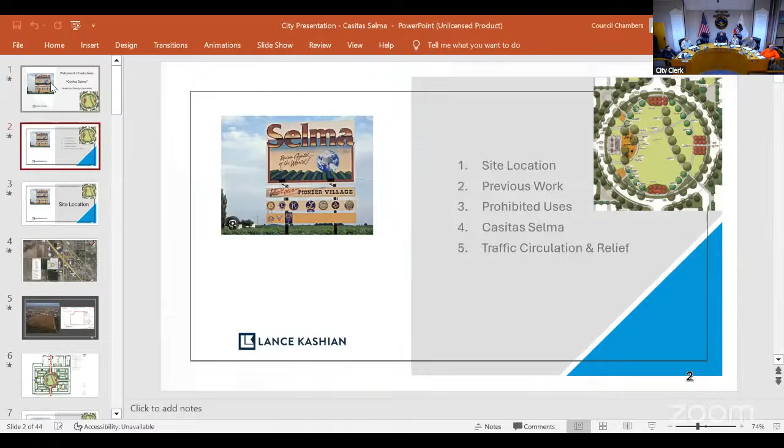That's... the other one. Get the slideshow ready. Can you guys hear? It's quiet. Test 1, 2. Test 1, 2. Okay, sorry about that. You can just make it bigger.

That one, okay. Before you, we have the Selma Casitas project, project 2022-0030. This is again for a general plan amendment, annexation, pre-zone, tentative subdivision map, and site plan review. Click on the screen somewhere, please. There you go. The applicant for this project is River Park Properties 2, owner Edward M. Kashian. The location of the property is west of Highland Avenue, north of Rose Avenue, south of East Floral.

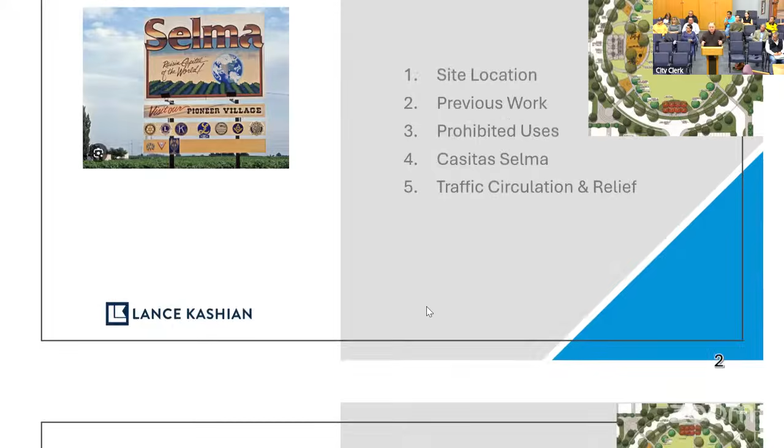We clearly know that there were several questions. We were fortunate enough to be able to meet in this room a few weeks ago and have a community workshop, have certain questions raised and respond, so to inform the community.

Site location - as Lupe had indicated, it's on the west side of 99, south side of Floral. So this is where it looks like juxtaposed up against the balance of the city.

And there's an aerial view of the real estate, the subject real estate for the site plan portion that you can see is obviously just adjacent to the Food 4 Less.

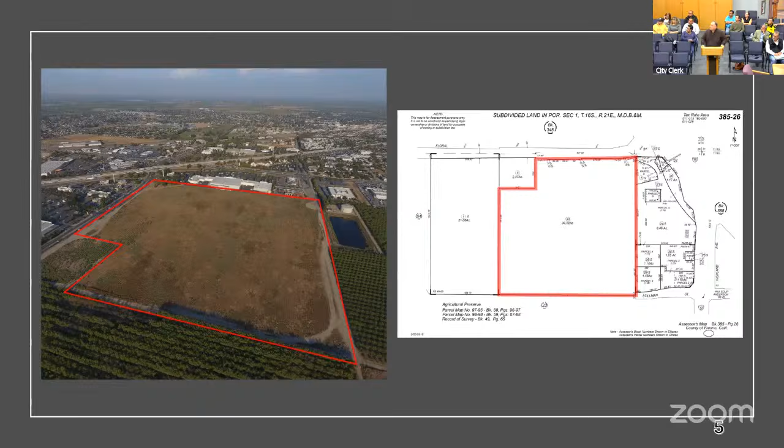This is a rendering of what the site would look like with the landscaping applied. Sometimes just seeing a plan view is when you're looking from top to bottom of what this would look like, and we thought this would help you understand the amenities of the project and how the park is juxtaposed amongst the community.

We strongly emphasize a pedestrian-friendly mixed-use project. It's something that we're fairly used to developing in the master plans.

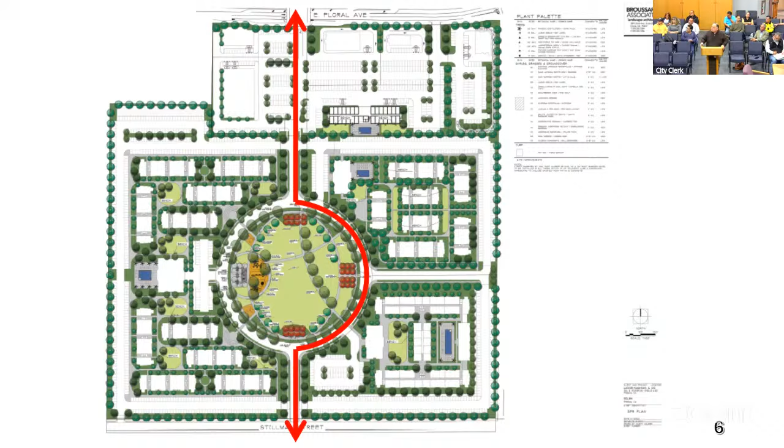We're entering into the city of Selma, and we take that very seriously. We think it's important, having grown up in Easton and the metropolis of Del Rey, we like to know who we're doing business with, that we're not going to be coming in from out of town and building something and leaving. We've kind of all grown up along here. In fact, I think I've lost too many games to Selma High football when I was at Washington, but we'll set that aside for a minute.

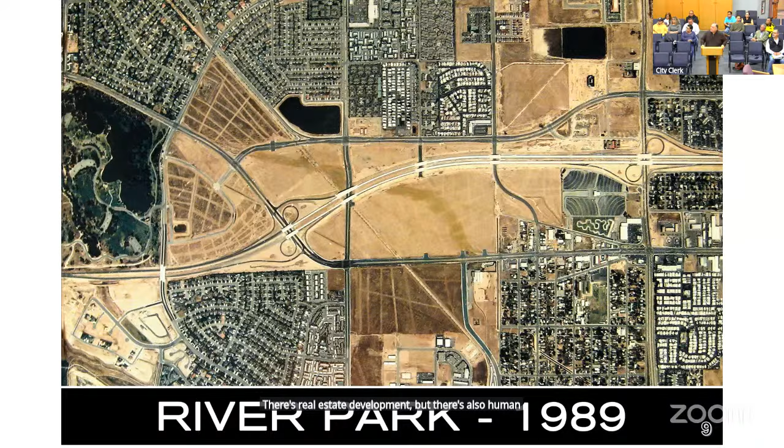This is the Village at River Park - this is the office side of this mixed-use master plan. We have about 500,000 square feet in multiple office buildings.

Then years later, there's about a 42-acre master plan on the campus of Fresno State. We felt like this would be an incredible amenity. Although I didn't graduate from Fresno State, I certainly attended, and Campus Point has done well - it's one of the highest densified areas, I think, in the valley, call it between Bakersfield and Stockton.

We have about 1,000 units of student housing that's really performing well. We have 141 units of workforce housing, an 80-20 mix with 20% affordable. We have 142 units we opened a couple of years ago - some of you may have been to Matavillosa, we're very proud of that, market rate senior housing, beautiful and performing well. We'll also open a 138-key Hyatt House Hotel, looking like December 10th. This is fairly dense, certainly much more dense than what we're looking at in Selma.

This is what Campus Point looked like in 2011, and you can see that in the master plan we laid down the infrastructure first, and you can see the beginnings of what we call Palazzo. That's the 1,000 beds of student housing.

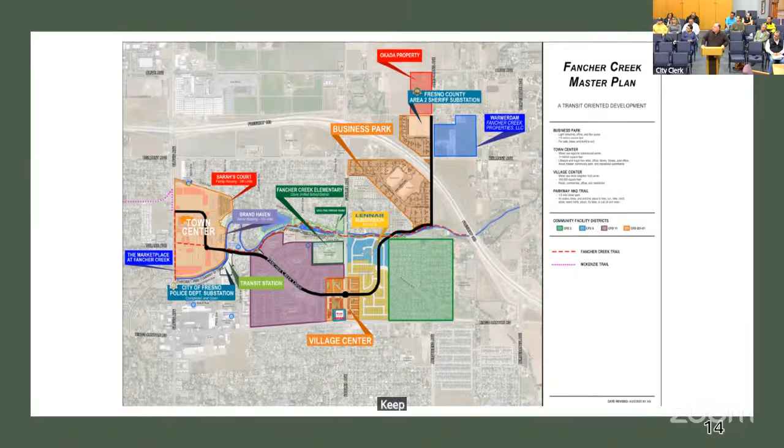We'll get there. This is a couple images of Matavillosa. We wanted you to see specifically some of the housing that we have developed.

This is Palmilla, the workforce housing on the campus of Fresno State that I mentioned earlier. And this is the Palazzo. This has afforded a lot of good experiences for students. They have a great time at this facility, and we have multiple property management teams that help us manage it.

So enough of that work. Let's begin to turn our eyes toward this great city, and discuss prohibited uses.

There's been a number of questions posed to our team asking why we don't design a Costco or a Target. We're fairly used to it. Ed Kashian's built, I think, 52 Costcos in California. We're a little bit used to it, but we're simply prohibited. We cannot. It's part of when we acquired the property, it's not something that we designed in.

This was formerly held by Walmart, and so it's restricted. We can't put a discount store, a wholesale membership warehouse club, a grocery store, a supermarket, a pharmacy or drugstore, a dollar store. You can see the list, and we're not going to do adult bookstores - that's not what we do for a living. But these are just simply prohibited. We can't. We're restricted.

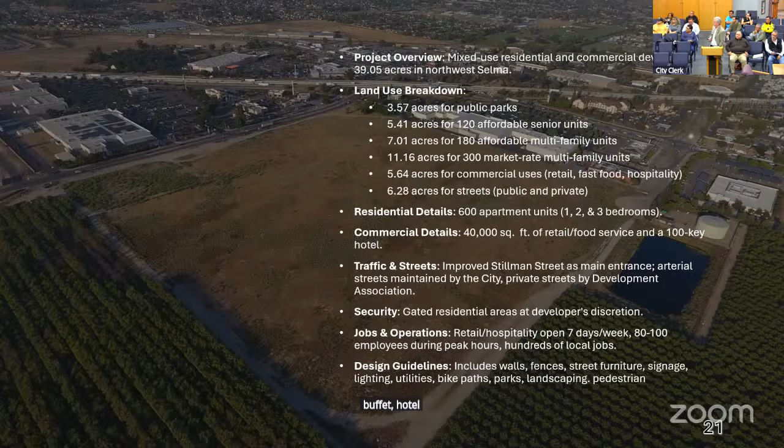We could go to the next slide. So the project is laid out in about 5 major areas. Along Floral Avenue we've got our retail portion. There's 2 pads laid out for drive-through restaurants, some linear retail, a large or mid-sized box planned on the west end here, and this would be the hotel here. That's kind of our front door off of Floral.

Once you get introduced to the site, you get into the housing area, and we've got 4 distinct areas of housing, all with equal frontage looking out on our central park. Affordable housing: 7 acres, 180 units, 3-story garden walk-up units with plenty of land for gardens, walkways, parks inside, and a 6,000 square foot clubhouse for the pool area and main front door of that unit.

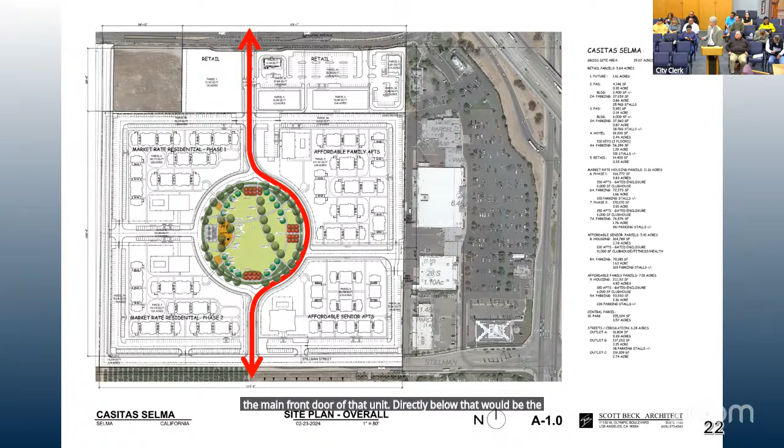Directly below that would be the affordable senior housing—similar layout, 120 units, 3-story walk-ups, about a 10,000 square foot amenities clubhouse. The west part of the site is divided into 2 equal areas for market rate housing, each with 150 units. They're all meant to be about equal scale, and they all surround what we call our central park area, about 3.5 acres, about a quarter mile in circumference. I'm going to have Dusty explain a little about what's going on there.

Dusty Valero, Broussard Associates. I think next slide, right? So we have the Central Park.

A lot of amenities here. You'll notice connectivity to the north, to the business center, connectivity to various areas throughout the site, up into each quadrant of the housing development, and to the retail center up north. We've got a robust park program here.

So in the center, in that kind of yellow area we show, we've got play equipment for ages 5 to 12 and 2 to 5, as well as a swing set. Those are popular, and a standalone spinner where kids spin around—really fun. So we've got a playground there for a lot of ages.

Below that, to the west, we've got a seating area with a covered shade structure. So this park is going to have plenty of green, plenty of shade, plenty of circulation for adults. There's park workout equipment at 2 nodes on the site, in the lower yellow portion. So you can take a stroll through the park, jog through it, stop at these little stations, get a workout in with your community group, and keep moving through the park, maybe while your kids are playing.

Up at the top we've got accent trees—the red shows beautiful accent trees with seating areas beneath, so you could sit, look at the park, take it in, just be in nature in this development. We anticipate barbecues, seating, trash and dog waste stations to keep it clean and organized. We think it's a pretty good program for the people who live here and for the larger community of Selma.

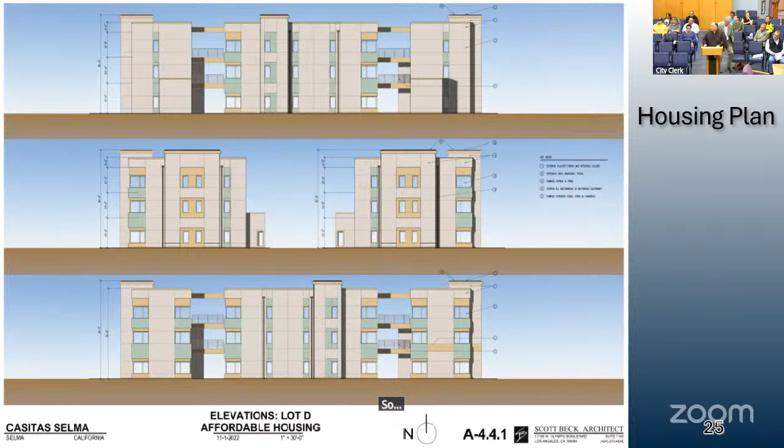We want to touch base because sometimes we get questions—that it's affordable housing, it's poor folks' housing, it's going to be rife with crime. So we just wanted to hit it head on. What is affordable housing? We really consider it workforce housing. Let's take a look at some of the work that we've done. Next slide.

In Selma, the average area median income is $55,000. Generally, what the tax credit committee calls affordable is units restricted to those making 30% to roughly 70% of area median income. So what does that mean in dollars? If your median income is $55,000, you're looking at somewhere between $16,000 at the 30% area median income level, up to $39,000.

What does that really mean? Who are these folks? It's us. It's many of us who are just hardworking families that happen to have incomes that qualify. These are often your neighbors, our uncles, our aunts, many of my family members. They're just at a certain point in their income qualification, working a job at Walmart, fast food, or a cannery. The rents need to be affordable, so really this is workforce housing.

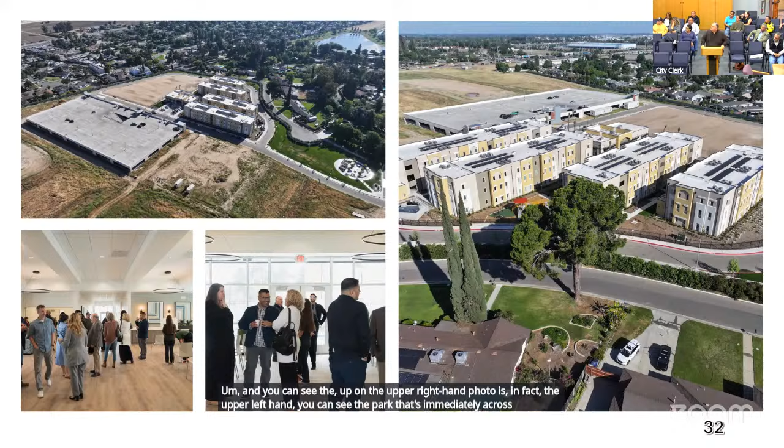This is the project. That's the interior on the bottom left, the community room with meeting space and workout rooms. In the upper left photo you can see the park immediately across the street. This area is not totally developed out yet.

This is the senior project — 180 units. Both this and Sarah's Court are 100% occupied, or stabilized around 98 or 99%, just due to some turnover. It's beautiful and affordable, with tutorial and social services coming in and out. It's very popular, and I think the residents there are very happy, very different from the housing project I used to live in in Delray.

This is very different than the housing project that I used to live in in Delray.

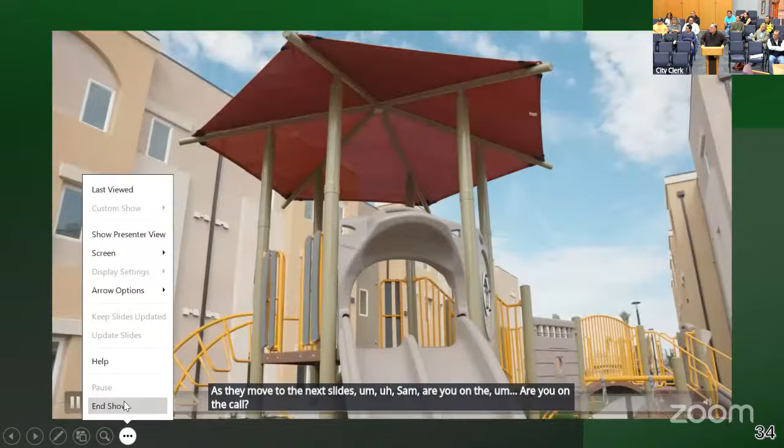We'll talk about security here in just a moment. Sam, you want to give us just a couple of bullets? Sam Bogdanovich — I didn't introduce him earlier, but he's our real estate broker consultant. For the 5 acres we have in terms of commercial, I thought this would be helpful so you truly understand what we're looking to accomplish. Sam, why don't you give us a couple of bullets on the status of retail?

Sure, you bet. My name's Sam Bogdanovich, I'm with Commercial Retail Associates. As Sal mentioned, we've worked together on all the projects you guys have seen tonight. Like I said at the community workshop, I probably have the easiest job here, and I probably don't need to tell the Planning Commission what a vibrant retail environment Selma is. It's really gotten to the population stage where a lot of national retailers are looking around town — pad users, fast food, chicken, tractor, a whole bunch of different retailers looking in town. Our project is going to include probably a couple national retailers, also geared towards neighborhood retailers to service the households that are part of this project and the surrounding areas. So my job's probably the easiest on the whole development because we don't have a lot of retail, relatively speaking. But as far as Selma goes, it's a really vibrant retail market right now, busy with a lot of people still looking to enter the market. Thank you, Sam, much appreciated.

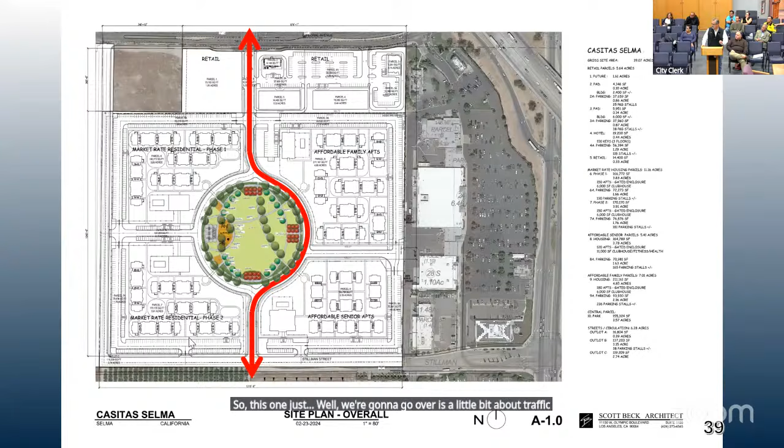So one of the things we have today is that the entirety of the traffic going to the Walmart shopping center, whether it be the auto dealership, the Toyota, the hotel, and the new businesses opened up by Neil Angelillo, which was the Starbucks, the Chipotle, the Habit, they can only get in and out from the eastern, southern, or northern part of the city through Floral Avenue. That's really their only choice without going a few miles out of their way. So that's what you're seeing in the arrows here.

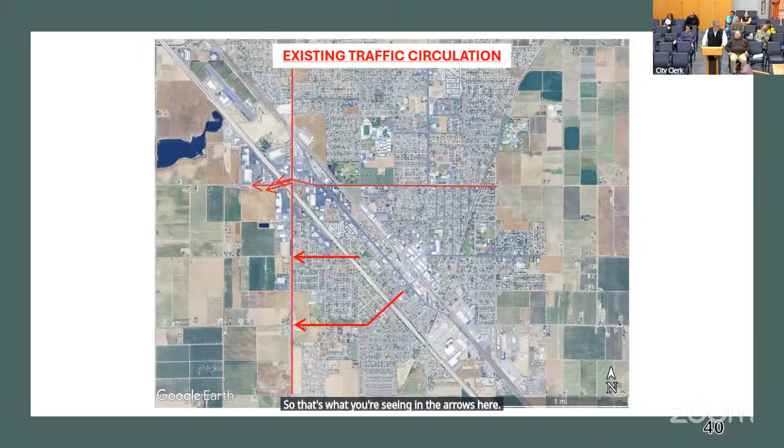Let's go to the next slide. So once the project's set up, it still has that, but this project will be building Stillman west to the western boundary and also a north-south street on the west side of the property. That acts a little bit of a relief valve. It's not going to solve all your traffic problems, we're not here to say that, but it will give us other ways to get to the project, and it will give the community other ways to get to the Walmart shopping center or to the western portion of the unincorporated area.

Another thing I'd like to point out is today, absent connection through Stillman and north-south between Stillman and Floral, we have no choice but to go through 5 traffic signals. Once this is built to get to this shopping center, the only signal that if you live on the southwest portion and possibly even some of the southern portions of the city, you could use Stillman and get to this center, and that would be one signal.

Hypothetically speaking, if you go through one signal on, say, a 90-second cycle length, and you catch it at the end, you wait the whole cycle, 90 seconds, through one signal to make that turn potentially. If you had to go through 5, you multiply that by that same amount of time, but a little more, because Highland at Floral is the busiest intersection, in addition to the southbound and northbound off-ramps from the 99.

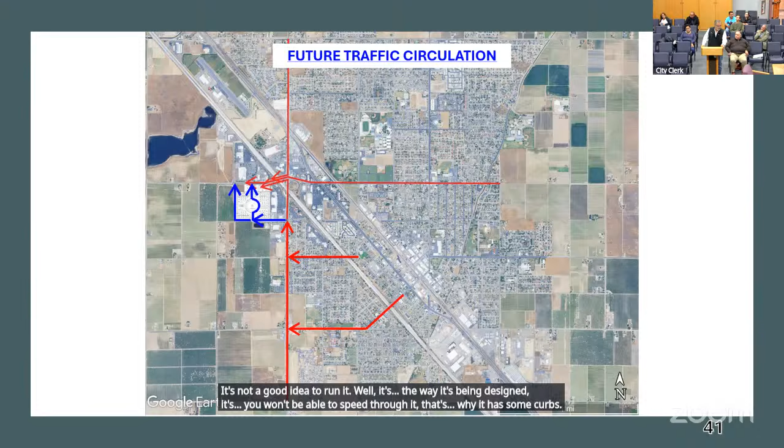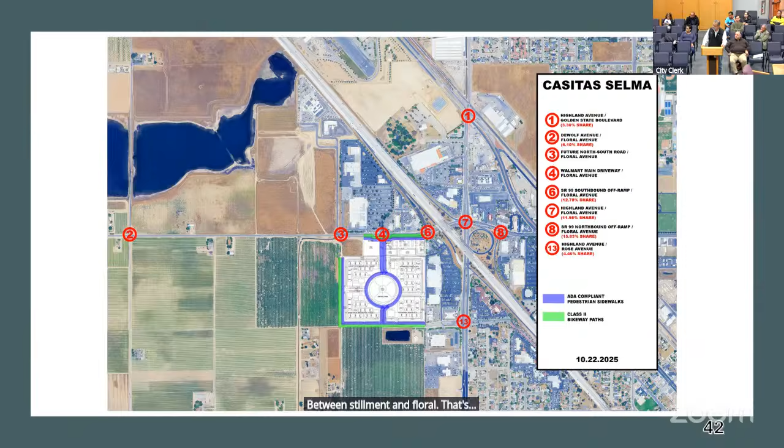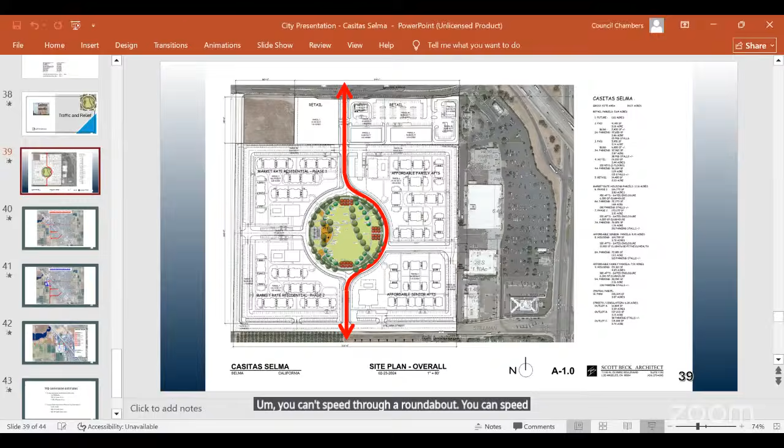Roundabouts aren't going to do it, because people don't even respect bus stops when picking up kids—they just go through those stops, and there are a lot of complaints on social media. With a roundabout, you're not supposed to go fast. I can respect that, but if you have a narrower, non-straight road with traffic calming measures like speed humps, you can't speed through a roundabout. You can speed through a straight intersection, which makes it more unsafe for pedestrians.

Having the road on the outside, away from a public gathering place, I think is the proper design here to ensure pedestrian safety for residents, including seniors going to the park. Keeping traffic as slow as possible around the park is the proper design call for the roundabout.

This is Jose Benavides, I'm going to answer the question. Right now it does appear to look like a very large roundabout, but in the design—let me find the pointer—this will be the main street, and these will be side streets. They would have no choice but to stop; that's how we're setting them up internally. So this would not have the operations of a roundabout, and it is not a roundabout. It looks like one, but that's not our intent. Our intent is that this is a curvilinear road, but this is the main road.

This side would work so that if you really want to get to this point, you'll continue straight on this side—you won't be changing direction like you would at a roundabout. It's hard to see, but right now you can tell it bumps out right here. As we get closer to the next steps, we'll prepare a design and potentially a cross section so you have a better understanding of how it's going to flow. But thank you for that question, I hope I answered it.

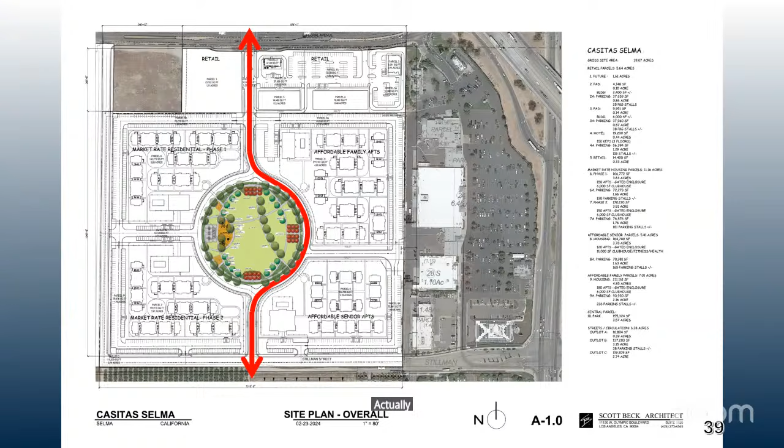My next question is... Actually Commissioner, can I respond to that really quick? The design difference around the high school is you have 4-lane roads on either side, north and south at the high school, and they're straight.

So it's considerably different than the design here that forces you around a curve and slows you down, tries to constrain you. The wider the street is, the faster people will go. The more constrained the street is, the appearance of it being tight, they slow down because they feel like they can't fit in the lane, and they have to come to an intersection that is curved, so they have to look around.

The design here forces people's brains to stop, consider their surroundings, and then decide where to go. Whereas with a straight road with no stop signs, you can just go straight and you're not necessarily mindful of your surroundings. As you're aware, the city, as part of our tactical urbanism grants, is trying to break up some of the monotony around our schools with visibility of crosswalks, paint, speed buttons - all of these things that constrain some of the areas around our schools so people drive slower. Because we are aware that we've had pedestrian incidents at our schools, these improvements are aimed towards pedestrian safety. If there's some congestion and people are driving slower, is that a bad thing for pedestrians? Not necessarily, because people have to slow down, but we do what we can between design and construction to try and protect pedestrians as much as possible.

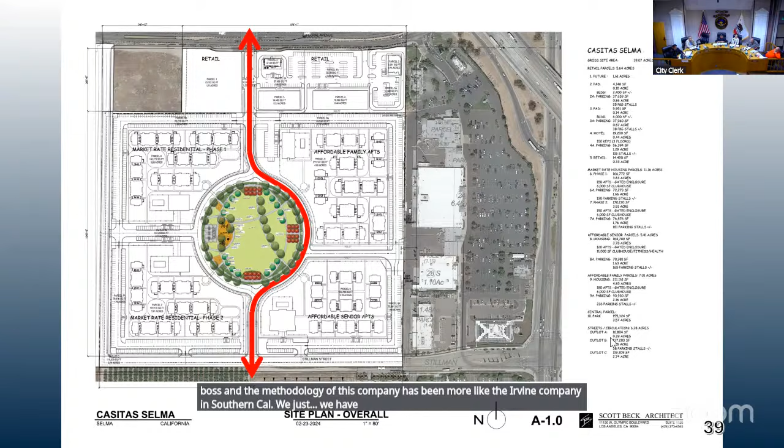On your question about workforce housing rents, they're probably going to be somewhere around $500 to $1,200. We'll have to see where the market is at on the market rate, it's hard to say today. I can speak to the affordables because, ironically, we're told what the rents are - the market doesn't bear the rent. We get a note from the tax credit allocation committee, and yes, these are deed restricted units, so trying to get out of them isn't something we'd do. We came to Selma because we think our product and our work, and where this community is headed, match.

And we think our longevity and our methodology together would be a mutually beneficial achievement. So back to your question, the rents are set to us on the affordable side. They do escalate - the tax credit committee escalates them sometimes every year, sometimes every 3 years. So they don't restrict our operating expenses. Those go up no matter what, relative to the market, and those costs generally go up when the rents don't. Does that help you understand? I can't see anything more on the market rate than $1,700-$1,800. We'll know when we hit the market. Thank you.